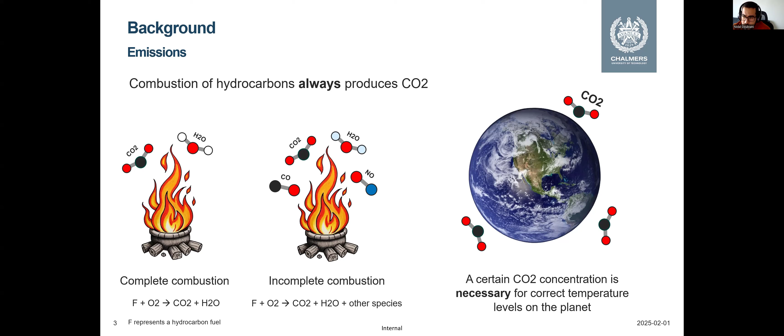etc. Another important thing to understand is that CO2 actually is not always bad for the environment. It is, in fact, necessary for a correct functioning of our planet, since it helps us maintain appropriate temperature levels. So a consequence of an increase in combustion is the high levels of CO2 emissions that it starts to produce. And this essentially means that the temperature of the planet will increase. So it's basically like cooking the planet.

In addition to other types of emissions that are harmful for both the environment and for the health of human beings. And finally, the other aspect is the depletion of resources, since if we continue to just burn hydrocarbon fuels, at some point the oil will run out, and then we will be forced to find another way to transport ourselves. So it's better to be independent from hydrocarbon fuels as early as possible before we get into this crisis.

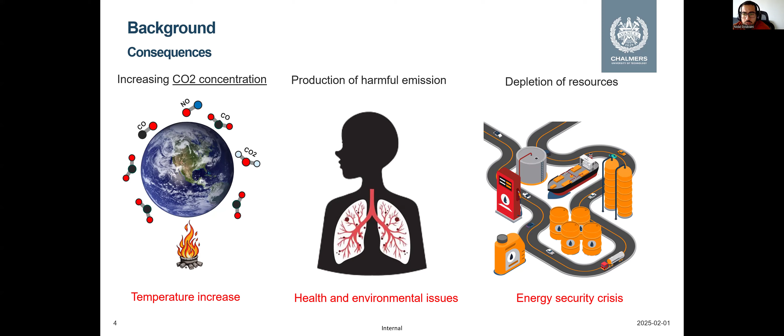So normally the political sentiment starts to change regarding the combustion of hydrocarbon fuels with internal combustion engines, and their reaction was to make the emission legislations more stringent, so more difficult. We have two graphs here that represent different levels of emission legislation. Here it's the Euro legislation for both gasoline and diesel, and we can see that the newer the emission legislation, the less allowed emissions are. So the concentration of emissions decreases with every new emission legislation.

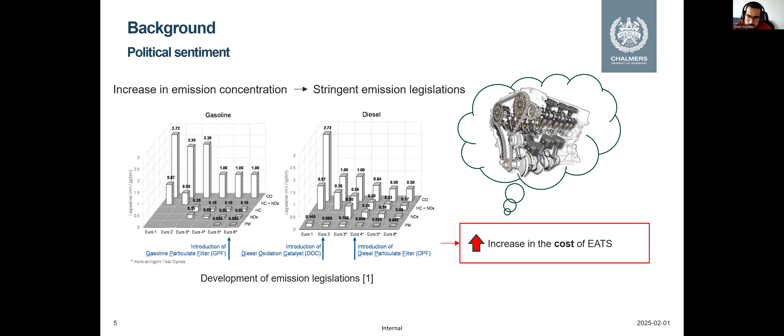And of course, in order for the automotive industry to respect these emissions legislations, they need to increase the complexity of their exhaust after treatment system, which is also called EATS. So of course, if you increase the cost of the after treatment system of your car, the cost of the vehicle will also increase. So therefore, some OEMs decided to actually stop using the internal combustion engine and jump to other technologies such as electric motors and fuel cells, battery stacks.

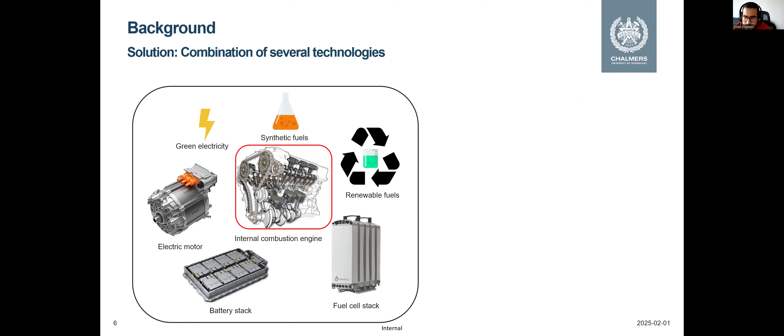But in my opinion, it's not the best solution, because we still depend on the internal combustion engine, because it will help other technologies to mature, which means that we need to continue optimizing our internal combustion engine by using different combustion technologies and different modeling capabilities. And as I said before, the internal combustion engine will actually help and drive the maturation process of other technologies.

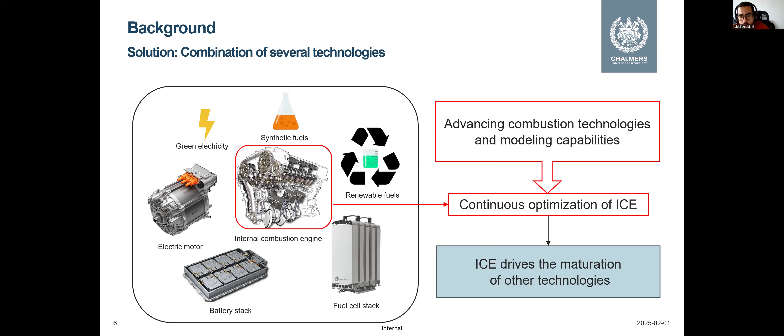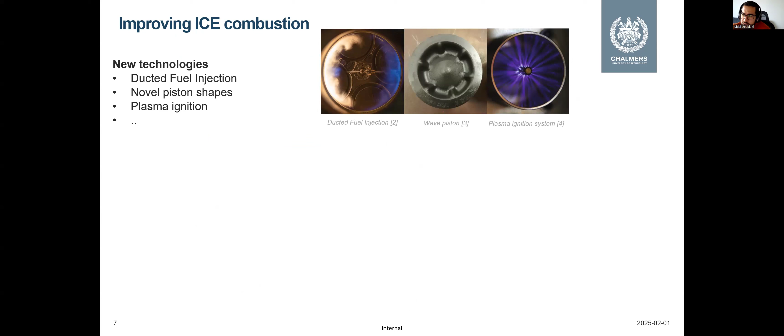So how do we do this improvement of internal combustion engines? You do that by presenting new technologies such as ducted fuel injection, different piston geometries. You can also introduce different kinds of ignition technologies such as plasma ignition. You can also operate in different modes and regimes of combustion.

You can use stratified combustion, where the combustible mixture is distributed differently inside the combustion chamber. You can also use dual fuel combustion, where you are actually injecting two fuels inside of your chamber, so one pilot fuel and one main fuel. Here, for example, in this picture, we see that we have diesel that will help ignite the natural gas because it's hard to ignite.

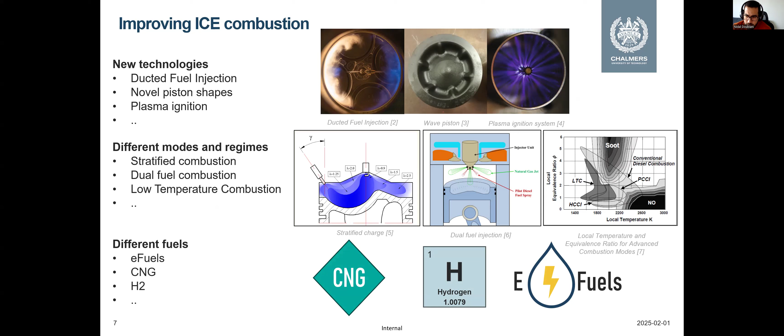And you can also use low temperature combustion that will help in reducing, let's say, bad emissions, or reducing emissions such as NOx that are produced in high temperature environments. You can also use different fuels, of course, such as electric fuels, compressed natural gas, hydrogen, and other types of alternative fuels that are currently being developed, such as ammonia or methanol or whatever.

So there is actually no one size fits all when it comes to turbulent combustion modeling. So instead, we use different models that are developed for different cases. In this scenario, we're using a model called the linear eddy model. Linear here means that we are using only one line, so it's a one-dimensional model.

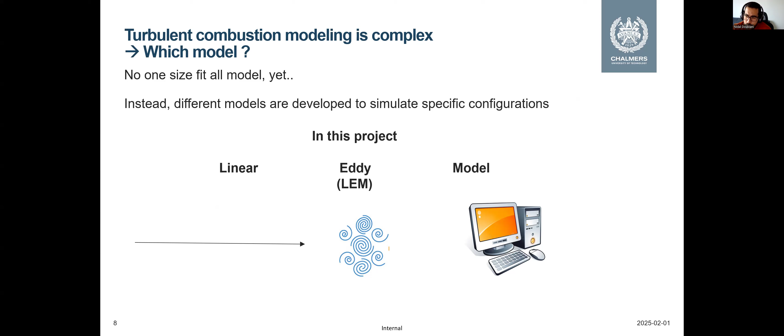Eddies are these kinds of vortices that you can see in different scenarios, when you are mixing your coffee with sugar, or when you have these kinds of movements in the water or in smoke. Turbulence actually exists everywhere, all around us. And when we say model, that simply means a computational model, because you can also investigate combustion processes in experimental facilities. But in this situation, we are using a computational model to investigate combustion.

So how do we do this turbulent combustion modeling? In LEM, or the linear eddy model, we want to simulate turbulence on a one-dimensional line instead of three dimensions. And we also want to simulate all sizes of turbulent vortices.

So as you can see here in this moving picture, you will have large eddies or large vortices at the start of the flow around here, and the more it develops, the smaller the eddies will be. That is also an effect of the energy level moving from this region to this region, and then you start to have smaller turbulence sizes.

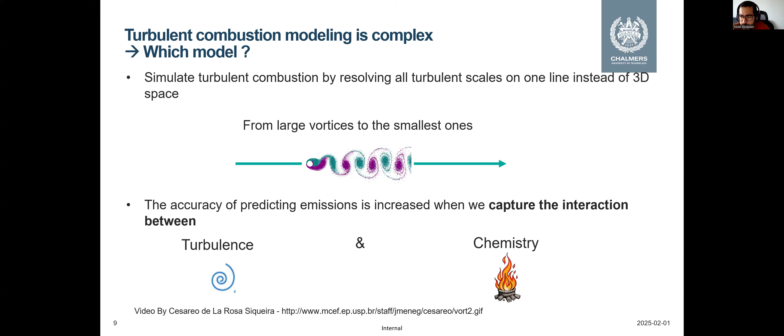Another aspect is that we want to accurately predict emissions, and you increase the predictability of your emissions when you better capture the interaction between turbulence and chemistry. So let's have a look at the influence of turbulence and chemistry on each other. If we start from the turbulence, if we increase turbulence on the flame,

at a certain level we start to see a lift-off, which means the flame being detached from the nozzle, as you can see in this image here. And remember, if you just quickly blow on a flame, it will disappear, and that's what we call flame blow-off. So the effect of high turbulence on chemistry simply means that it will kill the flame, kill the chemical reactions.

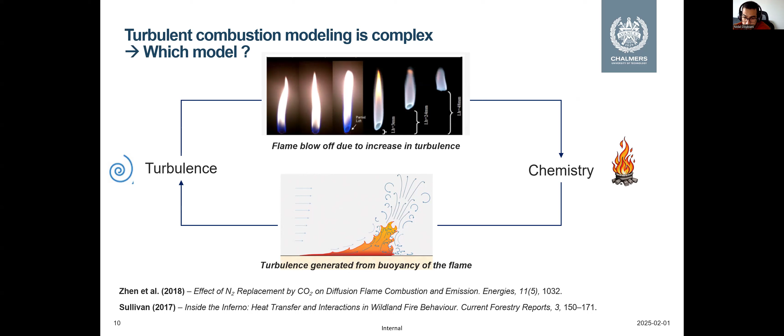On the other hand, you also have chemistry influencing turbulence by generating more turbulence. Here, for example, this image represents turbulence that is generated from the buoyancy effects of the flame. So there is an interaction between turbulence and chemistry, and in order to accurately simulate your combustion process, you need to capture these effects. Therefore, you need a model that is able to capture these effects.

So again, as I previously mentioned, we are using a model called the linear eddy model. Some of the characteristics of this model are that it is a spherical line, so it's two cones that are connected through a point, and that point is where we have our injection nozzle, where we'll be injecting fuel.

Then we distribute this line into small cells. In each cell, there will be chemical reactions that are solved based on the composition that you have in that cell. So if you have fuel and oxygen with appropriate levels of temperature and pressure, then you can have autoignition, for example.

So another aspect is that we are also solving or simulating diffusion and heat conduction. So the heat is also able to travel across the line, and also the diffusion of species. So species can also travel across the line. And this interaction between the species and the heat also influences the combustion process.

And finally, turbulence, of course, that's what we were talking about. So turbulence here in this scenario, since it is a one-dimensional line and turbulence is a 3D phenomenon, these vortices have a 3D shape. On a one-dimensional line, we are unable to simulate a 3D phenomenon, which means that we need to translate it into a one-dimensional type of vortex. And that vortex is what we call a triplet map. So triplet mapping is simply implementing turbulence on a one-dimensional line.

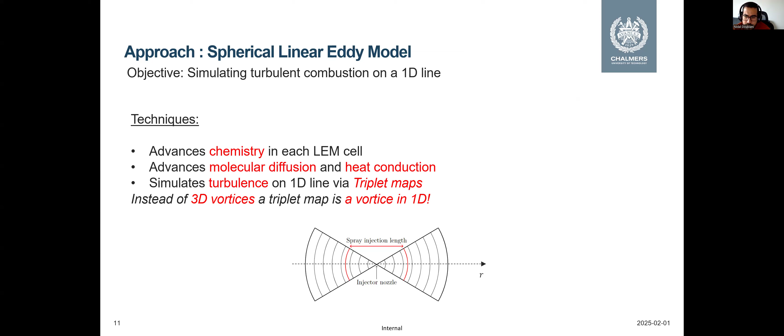So a quick description of turbulence modeling here, how it is done. So we start from a computational fluid dynamics mesh. So we take our geometry, we mesh it, which means we discretize it. We do that in order to solve the equations of flow, energy, and continuity. So the equations that will describe the distribution of velocity, density, and temperature.

And then, once we advance these processes and can also solve turbulence there, we send some representative parameters to our linear eddy model line where turbulence and combustion will interact with each other, and then it will give us a description of how the flame looks, and that we will send back to the CFD. So instead of solving chemistry in each CFD cell, which is going to be quite a lot, we solve chemistry and turbulence on a one-dimensional line, and it has fewer cells.

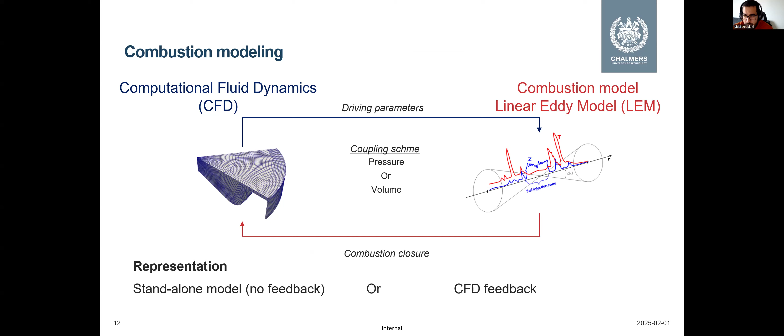The coupling can be done either via pressure or volume, and the representation can be done either with a standalone line or with the CFD feedback, as I explained here. So this is a quick video that shows how turbulent combustion develops on a one-dimensional line. The red line represents the temperature field, so combustion. The small vibrations represent turbulence, and the other colors that you see below: green, for example, represents the fuel that is being injected, and the blue line represents an intermediate species that appears and then disappears due to its progress.

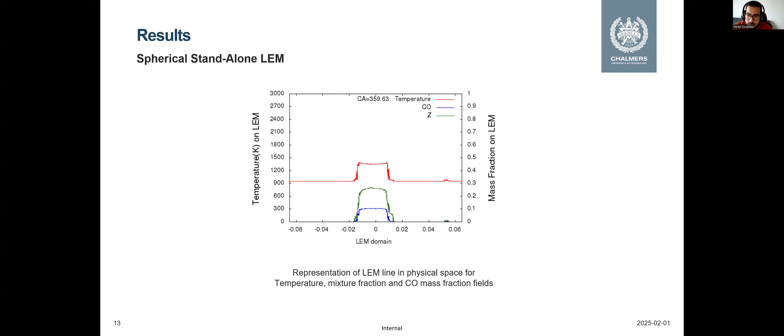And here are some results. These are some CFD pictures of the results of using LEM. On the left side here, it's a heavy duty case, both for a part load and a full load. The part load is on the left and the full load is on the right. RILEM also simulated a low compression ratio case with a different probability density function for the progress of the flame, with two different definitions of this parameter, either with oxygen or with the formation enthalpy here. So it was also able to predict that.

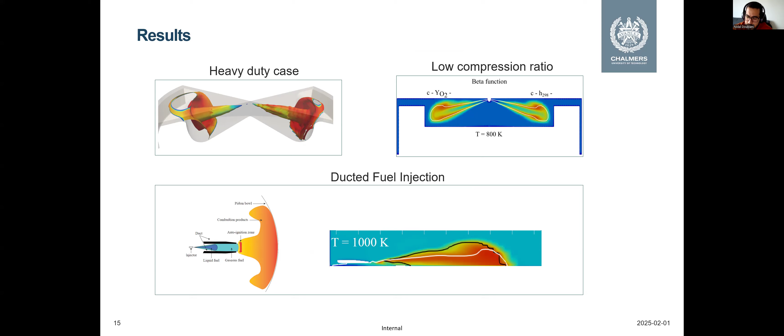So as a general conclusion, what was done in this work is to upgrade the RILEM model from a volume-based system to a pressure-based system. We were able to introduce multiple LEM lines to capture different statistics. And finally, we were also able to manipulate the flexibility of the LEM line. Since it is represented in physical space, we were able to use this feature to incorporate different geometries and their effects.